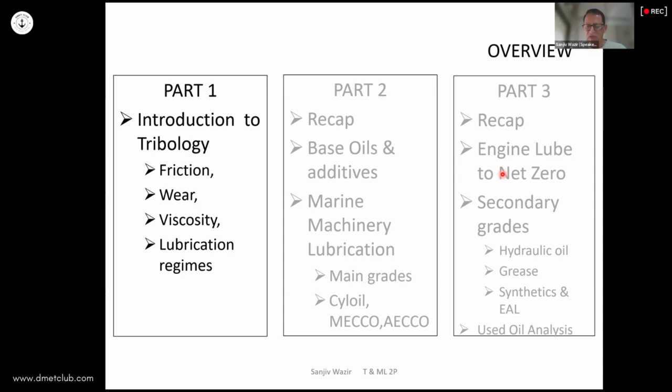So what is tribology? It's basically the study of friction, wear, and lubrication of interacting surfaces in relative motion. Characteristics of films of intervening materials between the two surfaces, and the consequences of either film failure or the absence of film. The word itself came from a Greek derivative, from a Greek word tribos, which means to rub. And it was a very recent invention - in the 1960s, this started being used as a word to describe what is tribology.

Tribologists like to claim that it's one of the most important subjects that no one has ever heard of. It's not a very familiar term in our engineering. When I was doing engineering, we covered maybe one 3-hour lecture on lubrication, that's it. We say lubrication is the lifeblood of our machinery, but we don't talk or learn much about it.

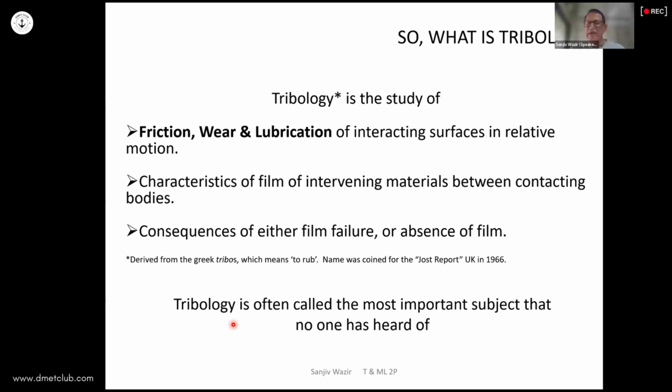But it's a very ancient art. As a multidisciplinary science it emerged in the 1960s, but the ideas of tribology have been around for a very long time. Humans have been using friction to light fire, and this was probably one of the great inventions of humanity.

Fire could give us light, could give us safety, introduced us to cooked food, and could be used to drive away predators, lit outside their cave. That was a huge step up for humans, learning from fires being lit on trees by lightning, and then realizing that you could actually control it. That was a huge use of friction.

Wear has also been around as humanity moved from hunter gatherers to farming, so they needed to improve their tools. They started learning about filing down and sharpening and so on. So wear was also in use.

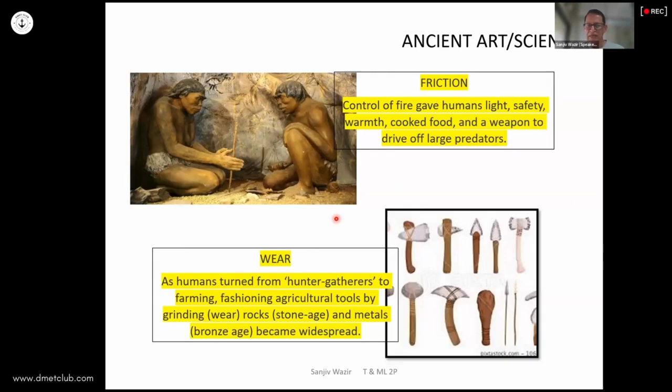Similarly, lubrication itself has been in use for a very long time. There are Egyptian hieroglyphics which seem to be showing some fluid being poured in front of rocks that were being dragged for the pyramids. So there are signs of that from ancient Egypt.

There are also Roman relics of Roman chariots, where some fats and oils of animal origin have been found, which were being used for lubrication. So even lubrication has been around for a very long time.

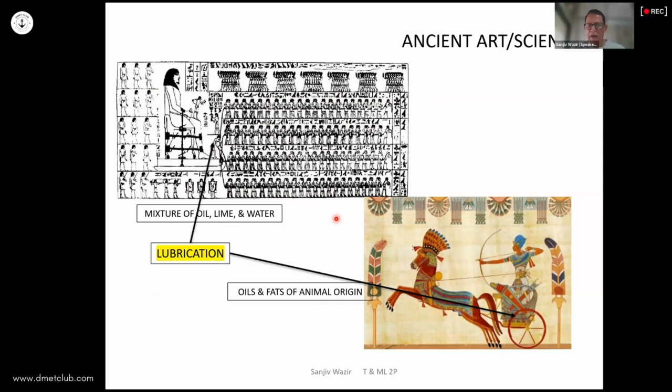Also, this movement from sliding to rolling has been a huge achievement from a humanity and civilization point of view, because we managed to come down from a very high friction kind of movement to very low levels of friction. So moving from sliding to rolling was also another big achievement for humanity.

As various civilizations interacted with each other, these ideas also spread around the world. Maybe they were invented in one or two places and then spread all over. It so happens that this movement to rolling was invented in both the Eastern Hemisphere and the Western Hemisphere. Apparently rolling was also invented in the Andes, but for some reason there it did not progress beyond making toys. Whereas in our part of the world, Europe and Eurasia, it slowly evolved into something we see every day on our roads.

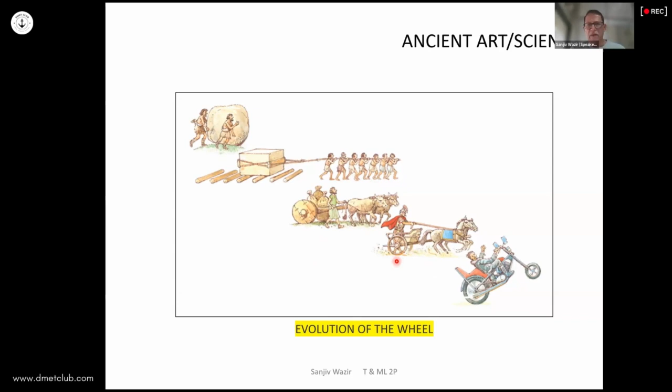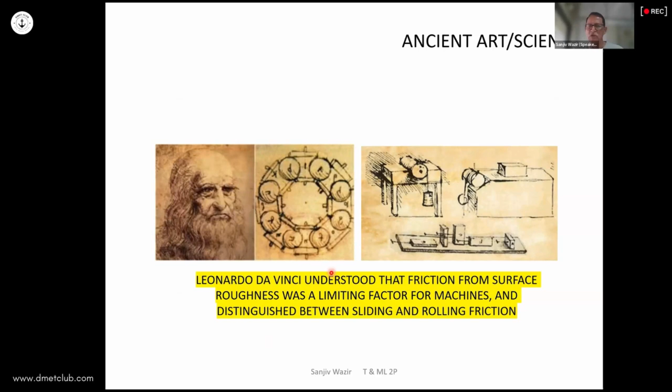Since the Middle Ages, tribological issues have also been studied, and Leonardo da Vinci was one of the first to realize that friction and surface roughness play a huge role in the efficiency of machines. He was also an inventor and designer of many machines, so he realized it was a limitation factor in their efficiency. He also recognized the difference between rolling and sliding friction, and some of his drawings still exist which show he was thinking about these things.

Going on to where do we encounter tribology? As you would guess from the background just described, it's everywhere. For example, you have it taking place in nature, like the gecko's feet. If you have time, you should study this - the gecko, a lizard type of animal, sticks to surfaces in such a way that it can even walk across the ceiling without any issues.

From that level, friction also extends to nowadays earthquakes being studied as a tribological phenomenon, in the sense that earthquakes normally take place when tectonic plates are stuck and then released, and the energy developed behind one of the plates is so high that it breaks the friction between the two surfaces and they slide, causing earthquakes. So if you could have seismographic equipment which measures the tension developed in one plate versus the other, and understand the coefficient of friction between these two surfaces, you could probably predict this. So even that kind of thing is being studied.

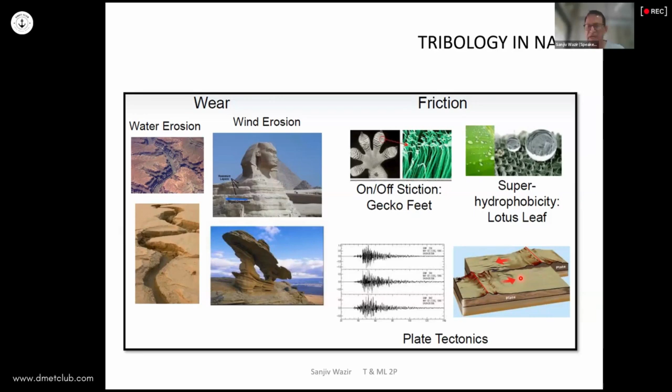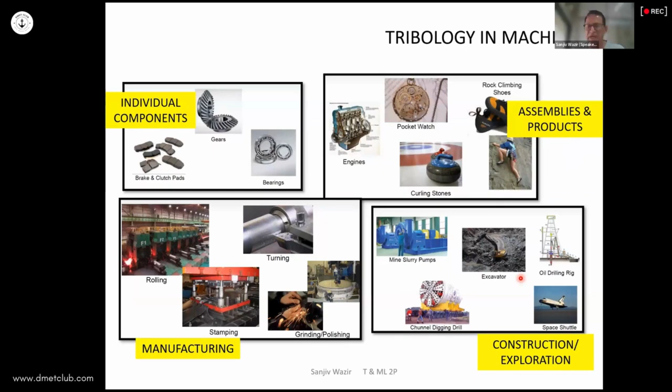It's of course, as I said, in nature. So as you would understand, all varieties of machinery, we have tribological issues coming up. Similarly, tribology plays a huge role in our life. We probably don't pay enough attention to something being a tribological issue. For example, we wouldn't be able to move without proper lubrication of our joints.

There is a fluid called synovial fluid which is captured in a synovial capsule, which helps the movement of our joints. And when something is going wrong, either fluid production is not enough, or the surface is deteriorated, then we have a lot of problems, like arthritis, rheumatoid arthritis, etc. That becomes huge, about more than 1 million knee replacements and hip replacements are taking place around the world per year.

Even these replacements result in metal on metal moving inside our body, metal on ceramic moving inside our body, metal on plastic moving inside our body. How the wear particles generated would be removed from the body, how long is this replacement going to last, what will the wear rate be and how long will it last? These are current topics in biotribology.

So tribology has now progressed further into having sub-subjects, like you have nanotribology, you have biotribology, and so on, geotribology. So biotribology currently has this as a major issue.

For example, our lifetimes have increased. So would it be good to have a knee replacement at the age of 50? If the wear rate is too much, then you might have to have one at the age of 70, 75 or something like that. So when is the appropriate time for which kind of knee replacement to be done so that it will last for the life of that person or something like that? So those are things being studied currently.

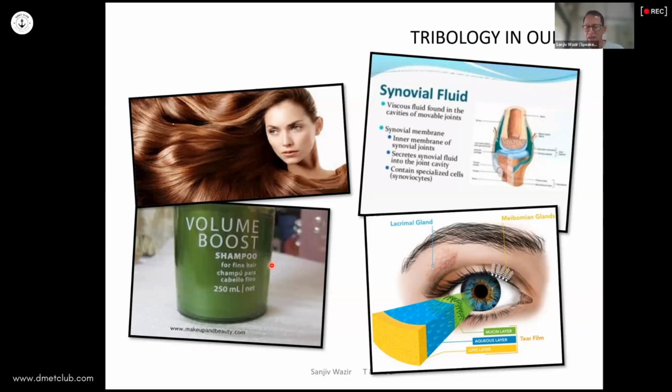Moving on to the main aspects of tribology, one of the main components is friction. When we want something to move, we need to apply force to overcome that friction which is preventing it from moving. There are some laws of friction going back to the times of Leonardo da Vinci, quite well established, which work in general conditions but not in extreme conditions. For example, at nano levels they might not work, or in vacuum conditions they might not work as well. But in general they work well.

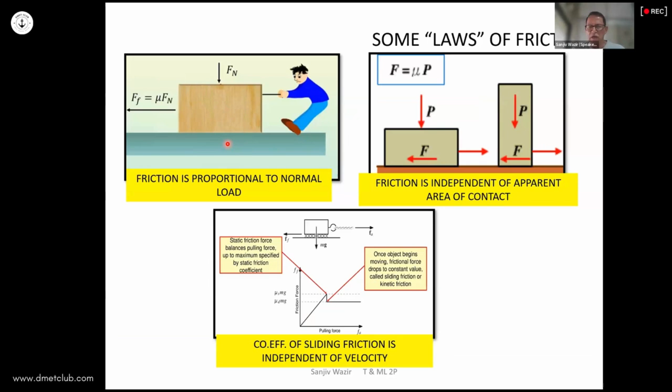We also know that once bodies begin to move, the coefficient of sliding friction is usually less than the coefficient of static friction. This is explained by the fact that under static conditions, many of the deeper as well as shallow asperities are making contact, so there's a large number of contacting points. But once motion begins, there is a certain lift-off taking place, so fewer contacting points remain. Some of the deeper asperities still make contact, but some of the shallower ones lose contact, so it's easier for the body to move along. This is why static friction is usually greater than sliding friction... wait, static is greater than sliding friction.

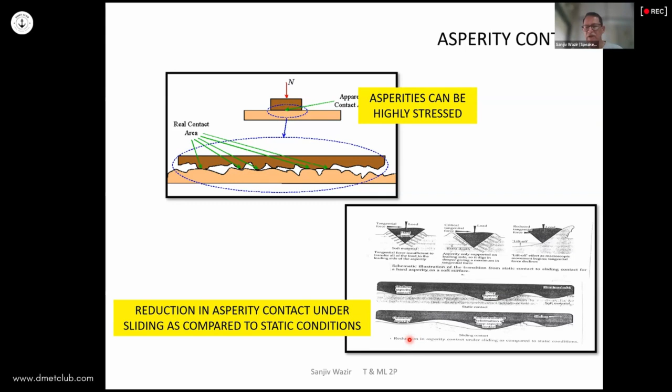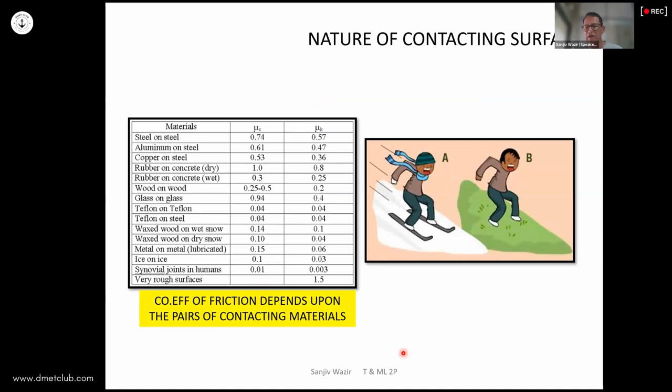The other major factor affecting the coefficient of friction is the kind of surfaces involved. Steel on steel, aluminum on steel, ice on ice, Teflon on steel, Teflon on Teflon - all would have different coefficients of friction because of the nature of the contact and how the surfaces interact with each other. So those are the three important things which impact the coefficient of friction.

There is also, of course, rolling friction, which is much less than sliding friction, but it is still there - when a body is rolling, eventually it will come to a stop because of rolling friction.

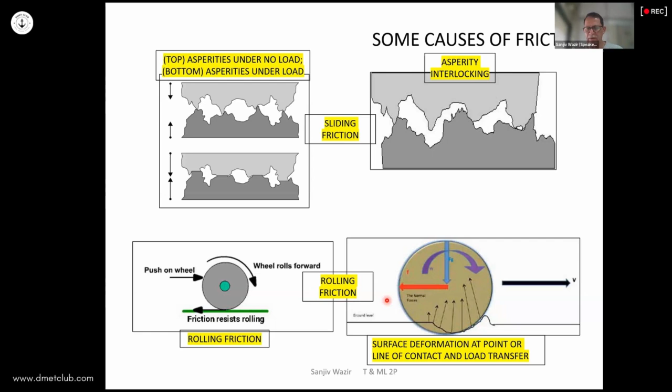Some types of friction that one hears about: one is dry friction - in our diagram where a body was resting on a surface, if there was no film of lubricant separating them, that would be dry friction. But if there had been some film separating those two surfaces, it would have been called lubricated friction. There is also, of course, skin friction.

For example, on board ships, we are aware of barnacles etc. coating the ship surfaces and then slowing down the vessel, or you needing more energy to drive the vessel at the same speed. There is, of course, rolling friction, which we just spoke about, and there is static friction.

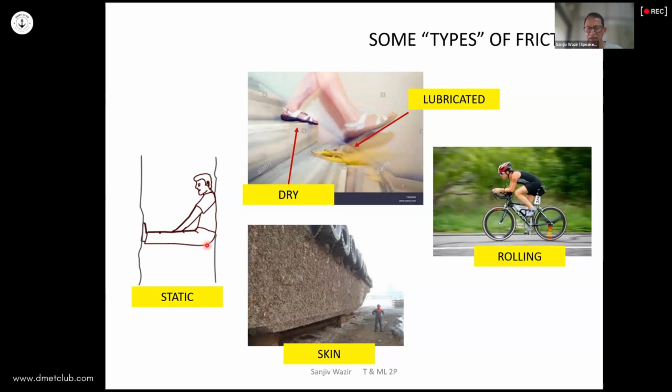If all that friction is allowed to go unchecked, we would end up with some kind of wear. In literature, you hear about many types of wear - for example, adhesive wear, abrasive wear, corrosive wear, which are the main components of wear in our combustion spaces. Then there is cavitation, erosion, fatigue, fretting, brinelling etc., which are other forms of wear we normally encounter in our marine environment.

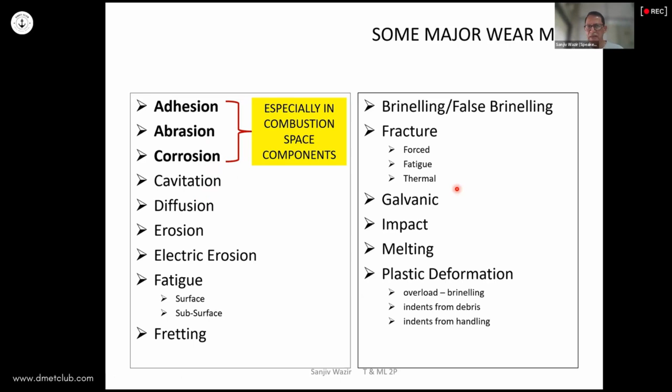So just quickly go through wear in the marine field.

That could lead to adhesion - sometimes they might form welds together, and when we keep applying a force, we break those, and we call that adhesive wear has taken place, resulting in the transfer of one material to the other surface.

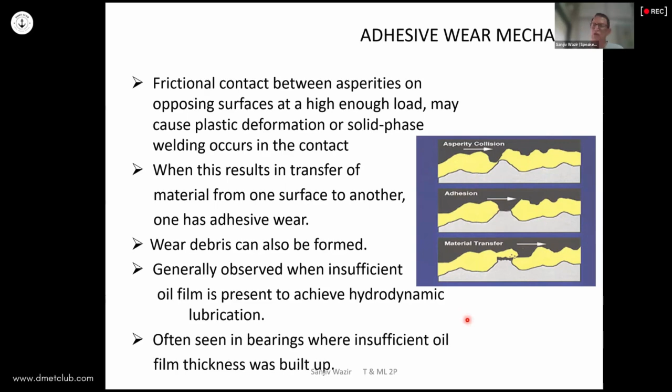The aim of that thick film lubrication is that it should be so thick that the thickness of the oil film is greater than the sum of these asperity heights. That is the thickness one would normally aim for, for good thick film lubrication. Where we lose that, asperity contact is possible, and then we have wear coming in as a possibility. Some examples of adhesive wear typically take place in areas where the film is lost.

For example, the valve stem is a difficult place to lubricate, and it is commonly known to have adhesive wear taking place on the valve stem.

The normal running-in that we have in the initial stages of our machinery is also a kind of adhesive wear, but it is actually a useful form of wear, in the sense that in that period the surface roughnesses, the excess surface roughnesses left behind by the machining process, are being polished off, so that you end up with a surface which will last for the rest of the life of that machinery.

But sometimes you reach a level of roughness where the oil film is lost, or the surface roughness is so high that contact does take place. When that excessive kind of contact takes place, we call it scuffing - that is a very extreme form of adhesive wear. So, as I said, a good thick oil film is the mechanism we normally use to prevent adhesive wear from taking place.

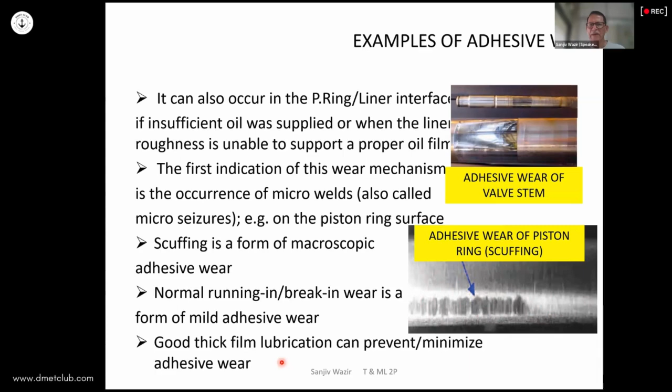Abrasive wear is another form of wear, and in fact it is the most common cause of loss of component life. What condition? When a hard material moves or plows material from a softer surface, you could say this is abrading the other surface.

For example, filing a piece of wood - the hard surface is removing particles from that soft surface, and that is causing abrasion of the surface. Abrasion typically involves mechanisms that could include cutting, fracture of the materials, displacement of the material.

For example, if dirty oil passes through a bearing surface, maybe the bearing surface might not be worn off, but it might be forming grooves in it. So repeatedly grooves are being formed, and so on. Or sometimes whole grains being pulled out - most of the metals we are dealing with are crystalline metals, so groups of crystals might be dragged out. That would also cause excessive wear.

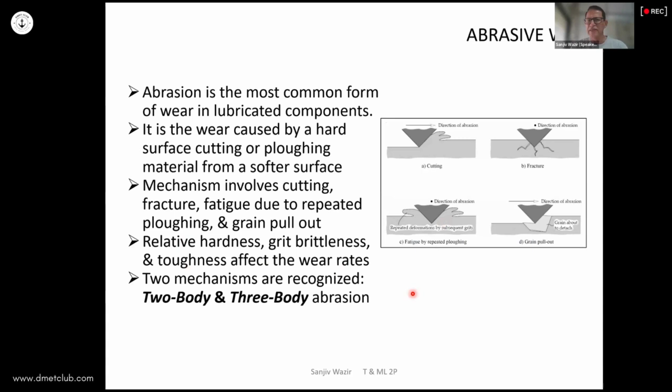So abrasive wear is of two kinds - two-body wear and three-body wear. Two-body wear is where the hard surface is directly acting against the soft surface, removing material or making grooves in the softer material - that would be two-body, direct contact.

Three-body is where the hard material is actually trapped between the two surfaces. For example, lapping would be an example of three-body, where the hard material is trapped between the two surfaces that we are lapping.

In three-body wear, one more important parameter is the thickness of the oil film versus the thickness of the dirt or hard material. For example, if the oil film was 50 microns and the dirt was 2 to 5 microns, that piece of dirt is likely to pass through without causing wear, so we're not really worried about that. What worries us is a grit size of roughly 40, 50, 60, 70 microns. That would be really dangerous, rubbing against the surface and causing wear.

This leads to another question: what level of filtration do we need for this oil film? If we have a 50 micron oil film, we might use a 30 micron mesh filter. But if we have a 10 micron oil film, we'd need a different requirement. For example, main engine crankcase oil has hydrodynamic lubrication with good thick film lubrication. Typically the main filter for main engine or auxiliary diesel engine crankcase oil would be around 30, 40, 50 microns. But for hydraulic oil, the film is going to be very thin, so the filter mesh size would need to be much smaller.

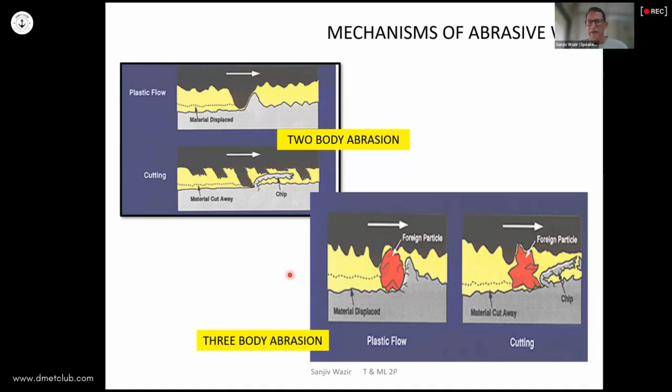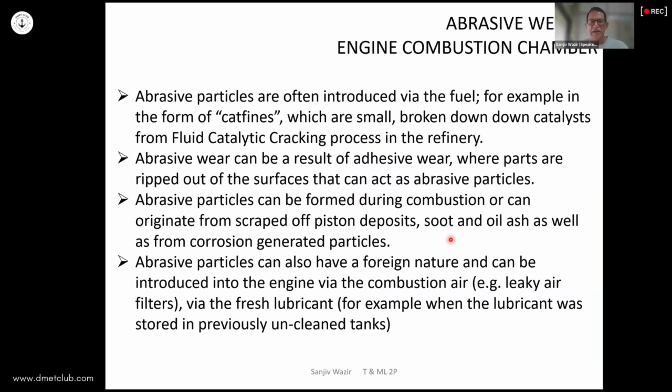Abrasive wear takes place in most equipment, but specifically in our combustion space we are always worried about cat fines. Cat fines are hard particles, aluminum and silica from the cracking process in the refinery. Sometimes some of it gets carried over into residual fuels and that could cause wear, either two-body or three-body wear. If cat fine particles are trapped between the piston ring and the liner, you could have three-body wear, but sometimes the cat fines get embedded either in the ring or the liner, causing two-body wear.

Similarly, nowadays you have very low sulfur but sometimes high BN products being used, and some of the alkalinity can accumulate as a limestone kind of deposit, which could cause two-body wear of the liner. This was the case I mentioned earlier: dirty oil rubbing through the piston, through the journal bearing, and causing grooves in the bearing.

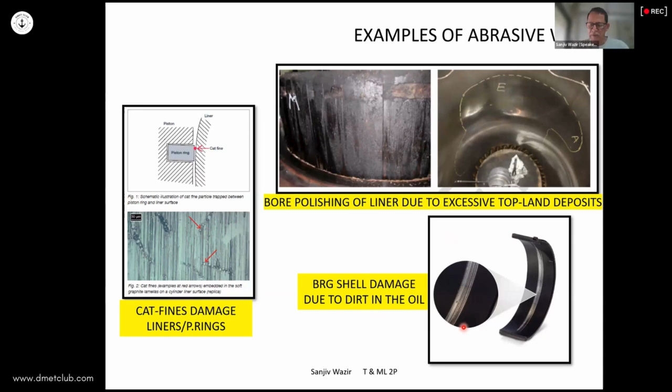So adhesive wear and abrasive wear are more mechanical kinds of wear. Corrosive wear is wear combined with the environment causing corrosion. Many environments might have chemical reactions taking place on the surface, could be acidic, could be moisture, or various other components degrading the surfaces. Usually when these reactions take place, soft films are formed on the surfaces, softer than the base metal.

These soft films form because of the environment, and then rolling, rubbing, etc. easily removes that film. If the environment continues to be reactive, the film forms again and is removed again, and that's how it proceeds. Mechanical wear by itself might have a certain rate of wear, and corrosion by itself, left undisturbed, might have another rate of wear, but when they come together, the rate of wear dramatically shoots up.

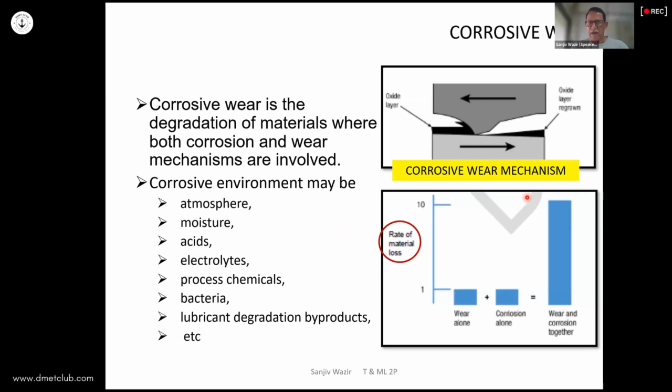One of the areas that was more prone to this is slowly going into the background because sulfur content of our fuels is now less. But until about 2020, we were always running engines with stoichiometrically excess oxygen conditions, so all the sulfur in the fuel would get oxidized. These reaction rates differ for different temperatures and pressures, and about 15 to 20% of the sulfur would eventually form sulfur trioxide. Water is also a component of combustion of the hydrocarbon fuel, as hydrogen finally forms water. So water is around, and acid gas is around. As long as it remained gases and left with the exhaust, we wouldn't bother.

But once water is formed along with the acid gas, and the surface temperatures are suitable for this to deposit as liquid acid on the liners, we used to have the problem of cold corrosion. That's why all our cylinder oils used to be so alkaline. Currently, the alkalinity of cylinder oils is in the range of 15 to 140 BN.

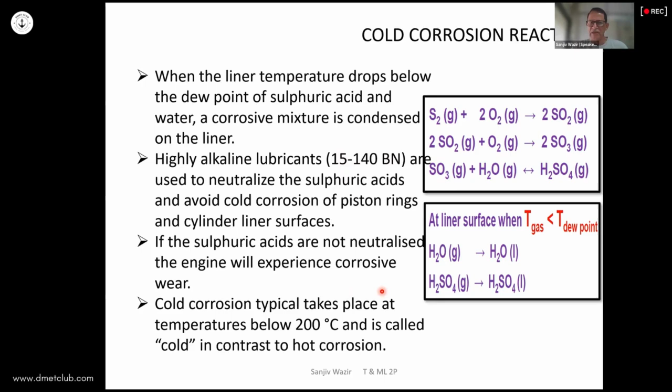So depending on the nature of the wear, nature of the machinery, and nature of the sulfur content, the BN of the oil used to vary. You're familiar with this cold corrosion that had become very common in the earlier era before VLSFO.

Moisture corrosion, hot corrosion is another issue. Sodium and vanadium deposits form eutectic alloys, which create a very low melting point, very hot corrosive liquid, and that starts cutting through the valves, etc.

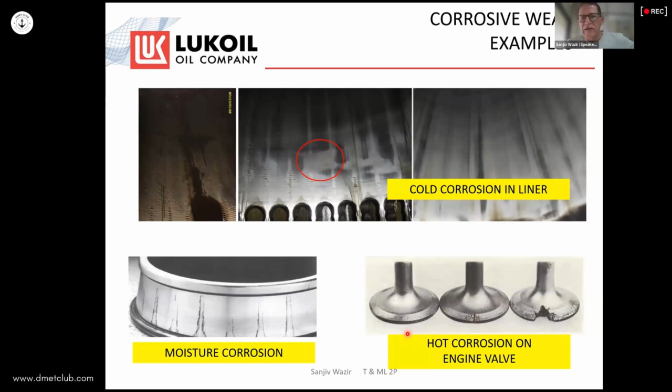Fatigue is another major form of wear. We use this term in everyday life also, like when we exert too much, we say fatigue. Materials exerted too much can fail due to fatigue, not necessarily stressed to the limits of their elastic strength. Even within the limits, if they're stressed too often, you could have fatigue-propagated cracks forming. Cracks could start on the surface or subsurface. So both mechanisms are there, and fatigue could eventually cause a lot of damage.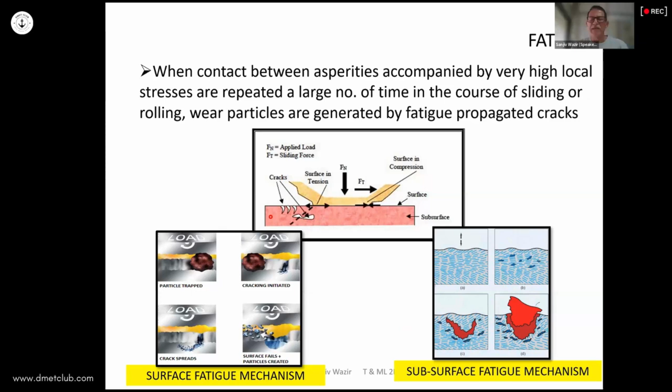Rolling element bearings, like ball bearings, etc., are particularly prone to fatigue. In a journal bearing, one does not necessarily expect fatigue because the nature of the surface is a sliding contact.

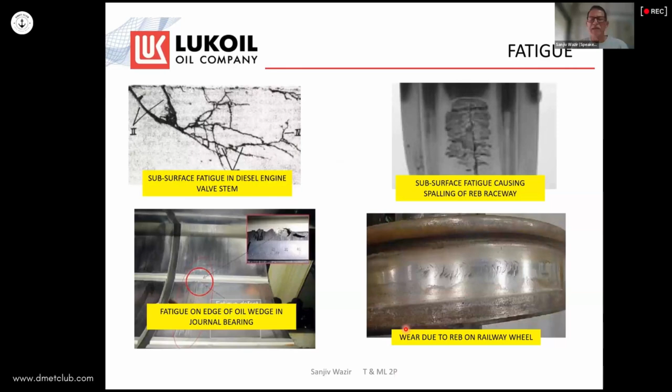But in a rolling element machinery, say this ball is rolling on this surface, so at that point of contact there has to be some friction. It's called traction. When this is applied over hundreds of thousands of cycles, eventually the traction force might cause a crack to be initiated. As the ball rotates further, the traction force may be trying to close down that crack, and in the very initial stages, it might even weld back together.

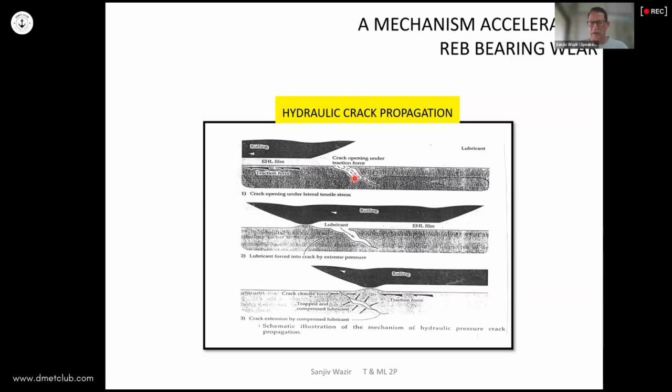But had we been using lubricants to prevent this from happening in the first place, or to extend the time before it happens, then these surfaces are now wetted surfaces, and if sufficient lubricant has got entrapped inside while we are trying to close down that crack, the trapped lubricant might create a kind of hydraulic jack effect inside that crack. The crack might actually propagate faster than had it been dry in the first place. So we need the lubricant to prevent this from happening or to extend the time before it happens, but eventually it does result in reducing the life of that equipment.

Fretting is another common mechanism: reciprocating motion in a very limited surface over hundreds of thousands of cycles. Eventually adhesive wear causes particles to be formed, and then particles get work hardened, and abrasive wear starts in, and so the wear rate changes. Maybe the wear rate might start like this, but then it goes like that.

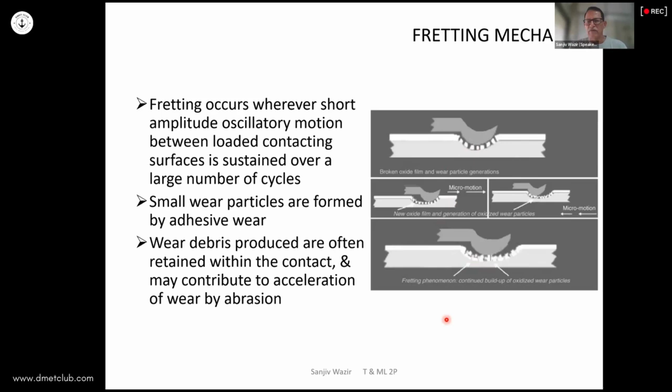You're familiar with examples of fretting. This used to be quite frequent. Any nut-bolted joint, any riveted joint not properly pre-stressed, you could have fretting coming into play, right?

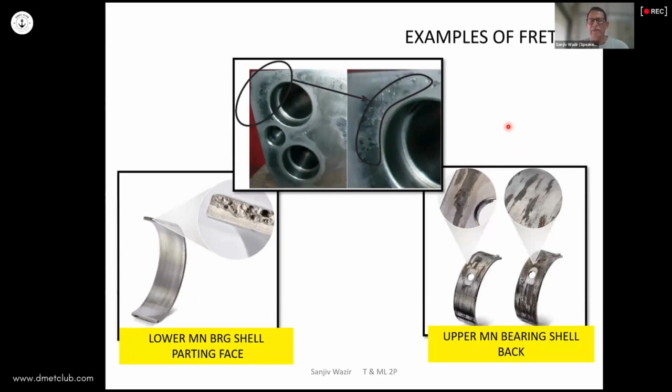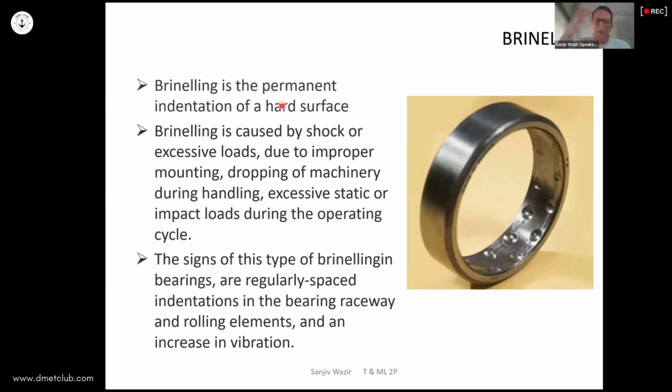Brinelling is another wear mechanism. If you remember from college studies, Rockwell and Brinell hardness tests involved a wedge-shaped device dropped onto a test piece, and you measured the depth of the wedge and looked at a chart to determine the Brinell hardness. So Brinelling implies actually displacement of material, not loss of material.

False Brinelling ends up looking similar, but is actually loss of material. False Brinelling typically takes place in equipment which is not in use, but that equipment is subject to some minor, light vibration from other equipment around. In that light vibration, say there's a ball bearing supporting the shaft in that equipment, gradually the bearing is vibrating and removing the oil film which is separating it from the shaft. Eventually metal-to-metal contact takes place, and that results in a dent, a kind of pit forming. But the pit looks very much like a dented pit, so that name has stuck to it, like false Brinelling has taken place.

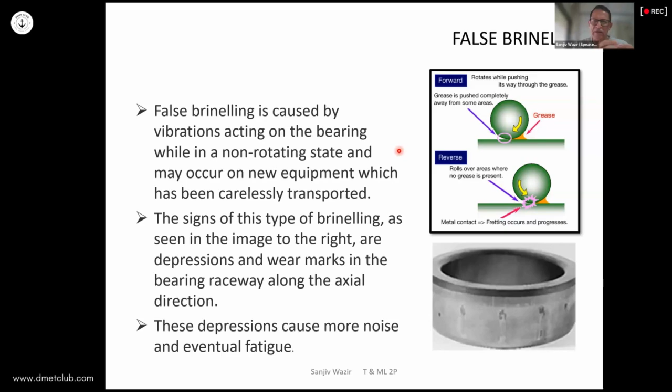Cavitation is another important mechanism. Basically, fluid passing through a zone where vapors of the fluid itself form bubbles in the body of the fluid. Air is not necessarily required, but air being there makes it worse. Bubbles of the fluid are formed, and then if the same fluid passes through a high pressure zone where the pressure is so high that the vapor in the bubble starts coalescing back into the liquid, the bubble starts collapsing, and then you have implosion taking place. And if that liquid jet forms near a surface and hits the surface, then you could have cavitation pitting coming in.

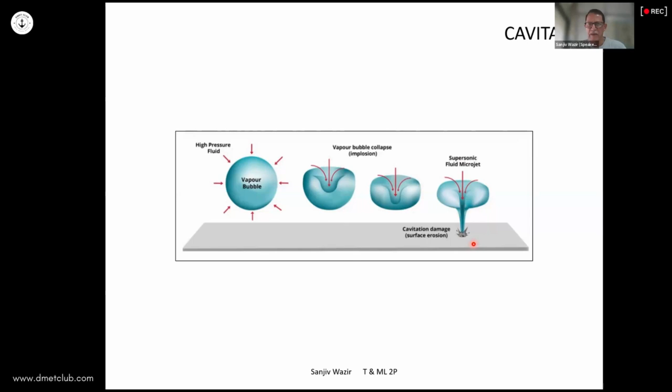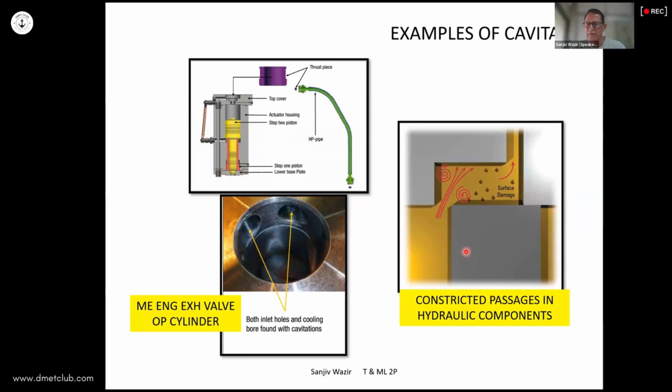So some examples: initial early ME engine exhaust valve operating devices had cavitation issues, and they changed the design. Hydraulic components, for example in a spool valve, the spacing is so tight that there's a high likelihood of cavitation impact taking place on the surfaces, causing cavitation.

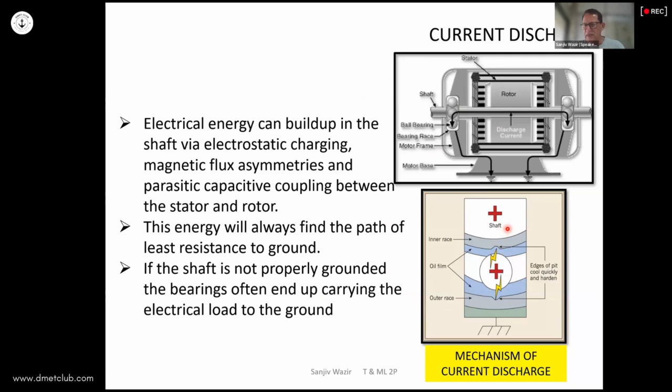Current discharge is another mechanism whereby many rotating equipment have a tendency for charge to accumulate on the shaft, and that charge looks for a place to discharge from. One of the easy places to discharge from is through the oil film between the bearings. When current is being discharged, spark erosion takes place, and the bearing can be damaged quite rapidly.

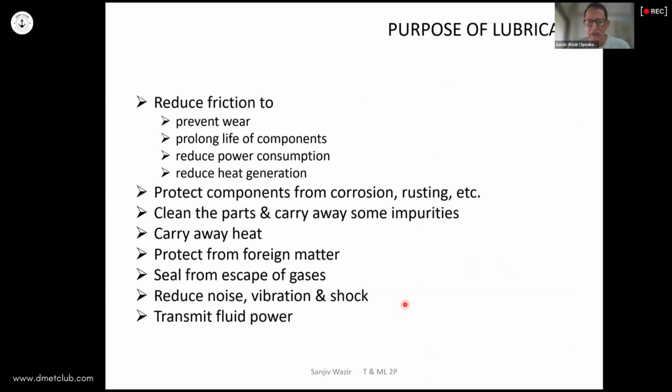So to prevent all this from happening, we bring in some form of lubricant to prevent friction, prevent wear, extend the life of components, and so on. One of the key requirements for lubrication is the right viscosity. Viscosity is the most critical property of a lubricant because it impacts so many properties of the oil film - thickness, strength, wear rate, etc. Everything seems to be coming back to getting the right viscosity.

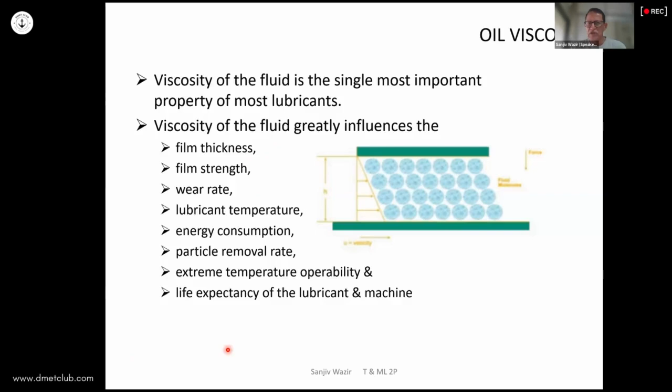Viscosity is a physical property, a natural property. It is basically the intermolecular attraction between the molecules which make up that fluid. If it is high, then the viscosity is high. If it is low, then the viscosity is low. For example, water has a low viscosity and forms droplets quickly, whereas chocolate syrup has a very high viscosity, so it forms a very long tail.

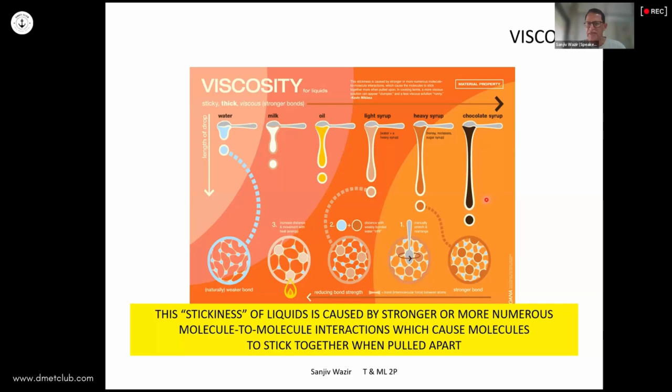But of course, being a physical property, when physical conditions change, viscosity changes. So if you were to heat this up, its viscosity would drop nearly to that of water, right?

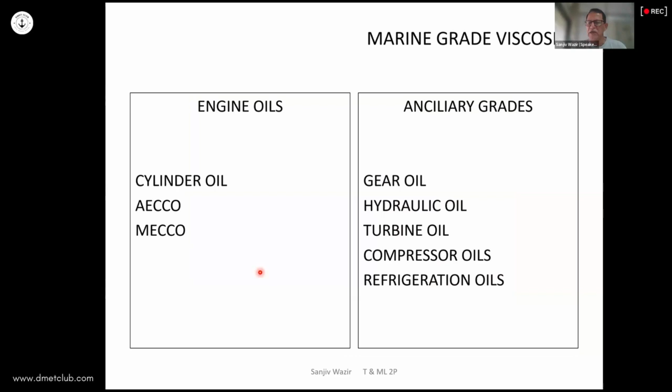Coming to engine viscosities, there are two varieties of viscosity ranges that we use. Engine oils go by something called SAE viscosity. The main engine crankcase oil is SAE 30, and the auxiliary engine is SAE 40 mainly, and cylinder oils are SAE 50. Basically what those viscosities imply: SAE 30 is an oil whose viscosity is between 9.3 and 12.5 cSt at 100 degrees centigrade, SAE 40 is between 12.5 and 16.3, and SAE 50 is between 16.3 and 21.9. These are the different viscosity ranges typically encountered in our marine field.

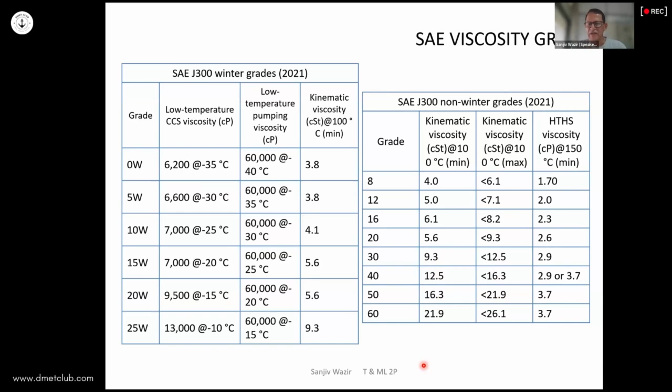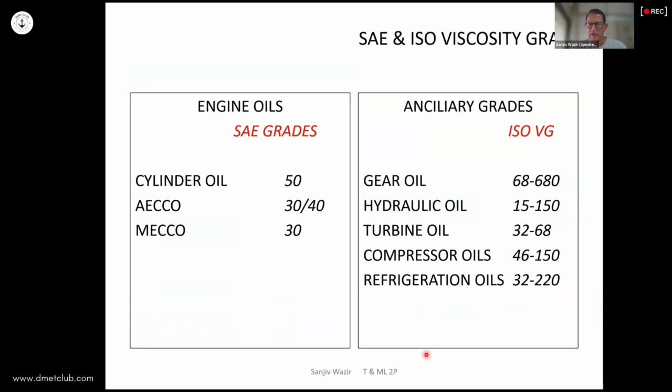The secondary grades, the ancillary grades, go by something called the ISO viscosity grade. ISO viscosity grades go from 2 to 1500. The nice thing about ISO viscosity grade is that it actually tells us the viscosity at 40 degrees centigrade. So ISO viscosities are measured at 40 degrees centigrade, and like for ISO VG 100, 100 is actually the midpoint of that range.

Of course, there is a 10% tolerance band, just like there was a tolerance band before, for manufacturing. So if you were to call an oil ISO VG 100, it could have a viscosity between 90 and 110 and still be known as ISO VG 100.

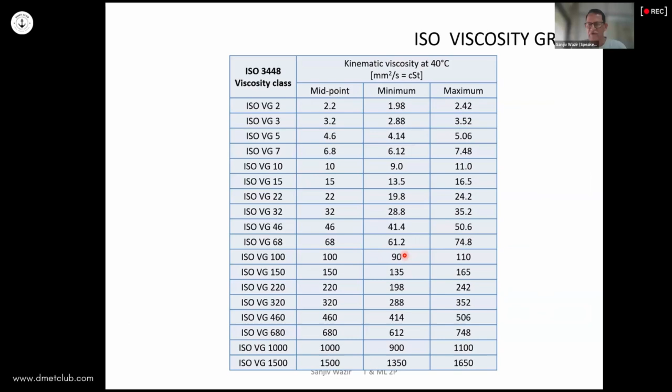So in viscosity, one of the terms we are familiar with is viscosity index, which gives us an indication of how fast or slowly viscosity changes with temperature. High viscosity index implies slow change in viscosity with temperature. Low viscosity index implies very fast change in viscosity.

And there is something called pressure viscosity coefficient. Viscosity also happens to go up with pressure - the higher the pressure, the higher the viscosity tends to go, for most lubricants, and it can be quite dramatic. Viscosity doesn't just increase by twice or thrice or 10 times - it can go up by 2,000, 3,000, 5,000 times. So basically the oil, instead of behaving like a liquid, starts behaving more like a semi-solid. It's that kind of dramatic change taking place during the time when this pressure is being applied.

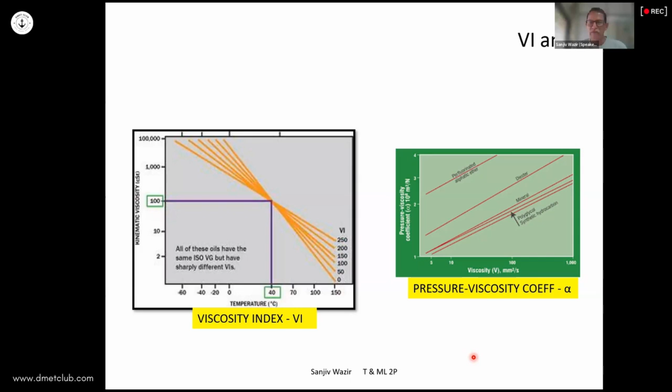Lubrication regimes - we have about 10-15 minutes. Everybody's familiar with hydrodynamic lubrication, where the movement of the machine itself causes the film to develop. For example, in a journal bearing, as the journal starts to rotate, the oil film gets trapped into a narrower and narrower wedge where pressure rise takes place, and that keeps the journal afloat in the bearing. That is rotary hydrodynamic lubrication.

In a piston ring in the liner, as it moves towards TDC or towards BDC, a wedge effect is formed between the piston ring and the liner, and that provides hydrodynamic lubrication. Of course, near TDC and BDC we lose this effect, and there we are relying on other properties of the oil, like boundary lubrication or anti-wear properties, to prevent wear in those areas.

Throughout its motion, ideally we would like to have good hydrodynamic film to minimize friction and wear in piston and liner. Thrust bearings also basically use sliding hydrodynamic lubrication.

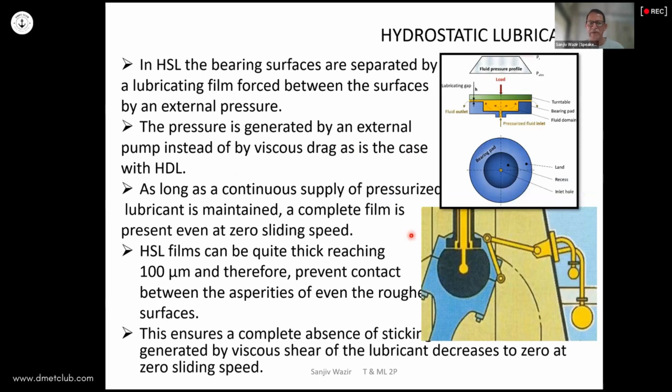Here we are looking at sliding contacts; here normally we are looking at rolling contacts. Under those conditions, the oil film was quite widespread, the contact was quite widespread, so the unit load at any one point was relatively small. But how does that work here, when the unit load can be immense at a very small point or line?

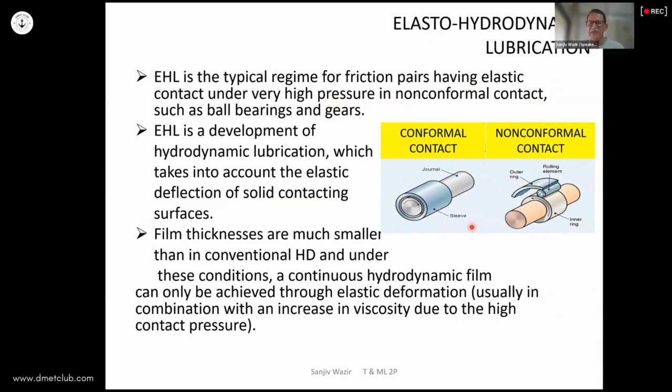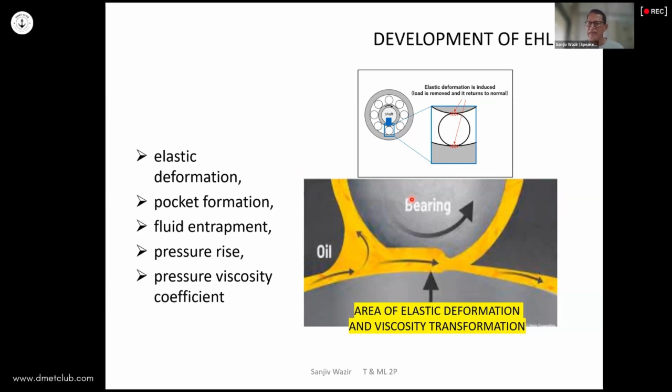Of course it can't be very thick, because the oil would spill out if it was too big, and that pressure rise would not take place. So usually it can be as low as 1 micron, but at max it goes to 10 or 12 microns or so - that will be the range.

So where is it useful? Virtually in all rolling contacts. In a ball bearing, for example, we don't want the ball to slide on the surface - it will get damaged in no time. We want the ball to roll, so this kind of mechanism is actually developed.

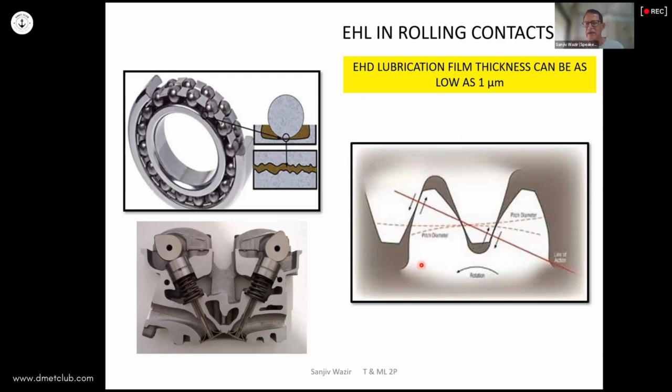Similarly, spur gear, for example - towards the extremities of the spur gear, you have sliding contact taking place, so hydrodynamic lubrication. But in that area of maximum load transfer, around the pitch circle, the contact is more of a rolling nature - there again you have elasto-hydrodynamic lubrication.

Squeeze film is a form of lubrication where, as bodies come closer to each other relatively rapidly, because of the oil viscosity, the entire oil film will not get squeezed out immediately. Some of the oil will get trapped within the two surfaces, and for those few milliseconds before it is completely squeezed out, that also provides a sort of film which separates the two surfaces from each other.

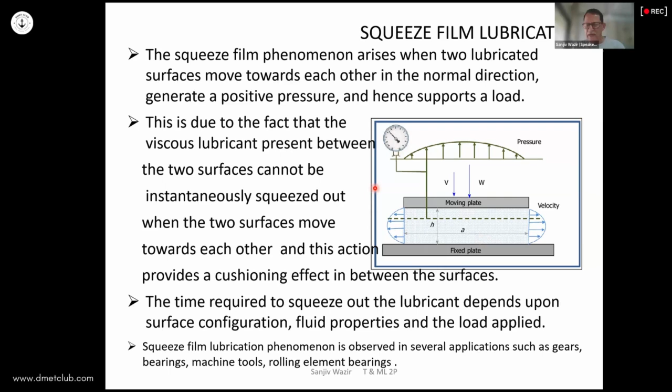So these are really, really thick, thin forms of lubrication. We talk about 1 micron, 2 micron, 5 micron kind of thing. Just to contrast with what we normally call thick lubrication - human hair thickness is 70 microns. So when you talk about 5 micron and 10 micron forms, it's not really very thick.

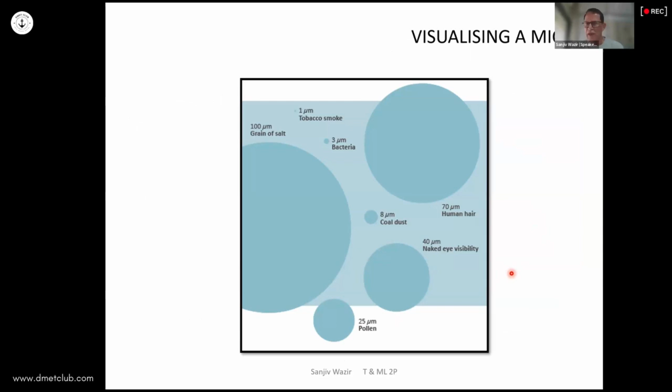So maybe in tribology we should put thick film lubrication in inverted commas, because there is another function we are now coming to, which is thin film lubrication. That is where we are not able to form all forms of lubrication - we are squeezed down to a place where asperity contact is likely to take place. But we would still like to prevent friction and wear from taking place.

So there we have films which stick to the surface - anti-wear properties, anti-boundary lubrication, extreme pressure properties, etc., which will form static films. All along we were looking at dynamic films forming; now we want static films which will stay there even when this contact takes place. There is a film separating the two surfaces. So that is where some compounds stick due to physi-adsorption on the surfaces, and some form a chemical attraction, and that sticks, forms a film, and provides protection against wear under those kinds of conditions.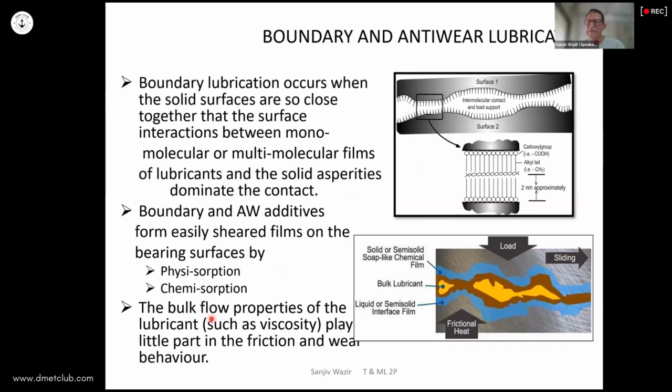EP is another extreme kind of anti-wear property where the reaction is quite strong, and the strength of that film is pretty high. That provides film protection under extreme conditions. So actually we call it EP, but the extreme pressure at the asperities results in high temperature - it's actually the high temperature which sets off this EP film reaction on the surface.

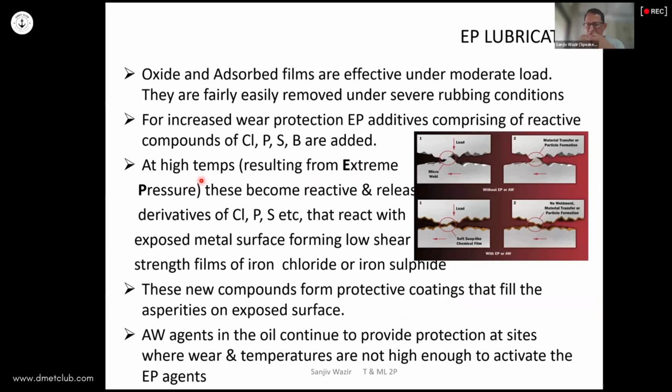The shear strength between the laminar layers is very weak - easily breakable bonds in the laminar between the surfaces. Under different kinds of forces it might last longer, but under shear it breaks off very easily, and that provides the lubrication at that point in time.

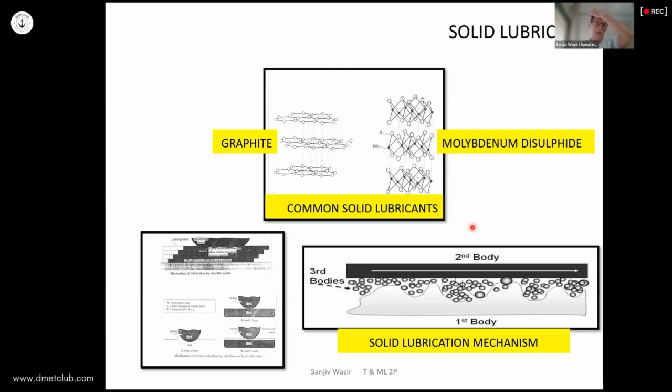So that brings me to the end of today's session.

So these two additional things the IMO has implemented, first through OCIMF - this human factor has come in. This is a new update because SIRE 2.0 has just been implemented for the last 3 to 4 months, so now they are catching on this part. They are not only seeing the defects, they are seeing the reporting of the defects and the process associated with why it led to this and how you prevent it. So this part is now being taken care of.

Now I had an inspection 2 days back, and we had observations which, as per previous inspection norms, should have been only 3, but now they have given 9 observations, because each observation is now turned into three, and now the vessel has to give a response on why they did not raise the defect, why they did not check it. So this is now being implemented and scrutinized by the oil majors and the whole business industry.

Very, very nice. Very nice, good to hear. Because I am no longer sailing, so I'm not in touch with all this inspection related stuff, but now that you've brought it up, maybe I'll read up on it also.

But since we are talking so much about bearing lubrication, I wanted to highlight that sometimes we don't think through what we are doing on board. For example, same example of the motor - say the bearing is opened for servicing and we find that the bearing is loose. So at least during my sailing days, the option used to be to punch a few marks on the shaft and then the bearing will be tight, and then we'll go on.